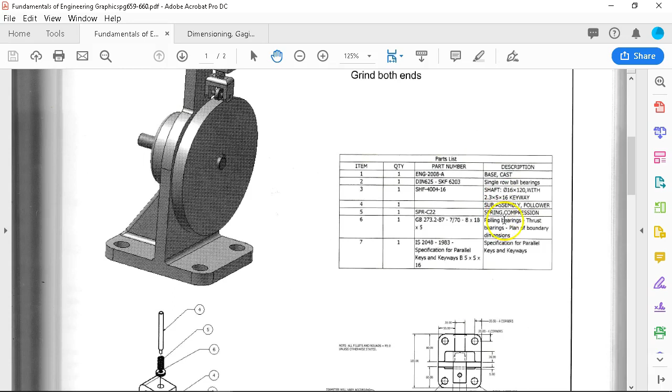We don't know exactly what the materials are. At least I didn't see. The base was cast, single row ball bearings. Shaft, assuming it's going to be a steel or a stainless steel. And then springs, roller bearings, parallel keys, and keyways. So assuming a lot of steel. Right? So we'd like to do an analysis of, if this is a fairly low pressure, maybe I could get away with having aluminum and making this a replacement piece. This is a consumable item.

Since it's going to wear out anyway, we do a 6061, and part of your maintenance schedule is it's easy to make, it's easy to replace, and once a year it gets a new one. All right, maybe it wears out too soon. Whatever this is being raised into and tapping against, maybe it puts too much load on this and it has to be a steel. Well, then what style or grade of steel? Probably not in the 1018, 1020. And if we're making things out of stainless, probably the roller bearing is stainless. We would have similar metals that would have similar wear rates.

And we have to decide, is the bearing our consumable, the maintenance item? In that case, if this is a big honking chunk of stainless, we don't want to replace this every year when we could replace the bearing. So decisions on materials come down to maybe this is a 440 series of stainless, harder, more wear resistant. And then the roller bearings are in the 300 series so that they wear out a little bit quicker.

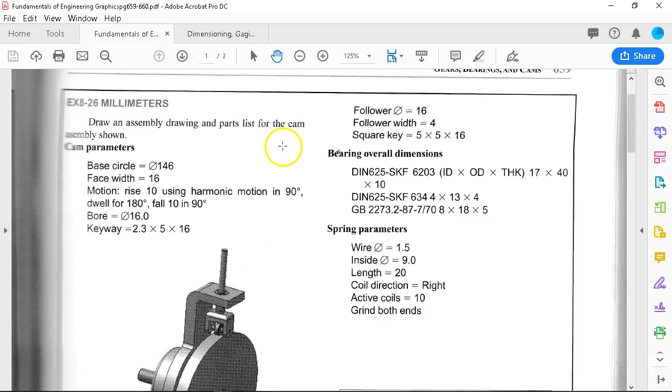So one of the things that I was looking for when we were doing the pulley and had to go back and find it was the chart in the Machinery's Handbook. I found my PDF version, and so those numbers that I was pulling for the pulley, I'm going to have to do pretty much the same thing. So a force fit or an interference class of fit pretty much aligns to a light press, a heavier press, and then you get into you're going to have to heat this one up and cool this one down to get them to force together, and they're pretty much never going to come apart.

So when I go into the cam and I'm looking at that 16 millimeter shaft, about 630 to 670, call it, we're going to be in this range for an interference of between 0.2 of a thousandth and 0.9 of a thousandth. So reading this value, the one that freaks me out every time I look at the notation is these are in thousandths of an inch. So 0.2 thousandths of an inch would be 0.0002 and 0.0009. Have to count zeros there. All right, so not a whole lot of interference, but enough to stabilize and keep this shaft running.

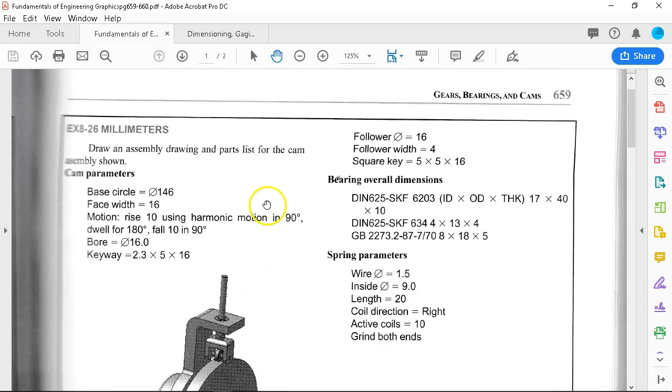All right, so the geometry, base circle of 146, there are no dimensions on this. They're just giving us specifications. Face width of 16 millimeters. The rise 10 millimeters, harmonic motion, 90-degree dwell, and then, or in 90-degree, dwell for 180, fall 10 millimeters. Basically, it says that the center of this circle, the shaft is going to sit 10 millimeters off of center. That also brings up rotational mass.

Right, so something that can affect our tolerance, or eventually will, as this thing wears and goes through its product life cycle, comes back to how fast are we turning this? If it's 10 RPM for the next 10 years, we're probably not going to see a significant amount of wear as long as the lubrication schedules and basic maintenance are performed. But if this is spinning at 1,000 RPM, all of a sudden we've got an unknown mass.

Probably when we get down to it, if we make this 16 millimeters thick, 146 millimeters in diameter, we're talking about 5/8 by a little over 6 inches. We're talking about something that's in the neighborhood of 3 to 5 pounds. All right, so we're talking 2.5 kilograms, maybe 3.

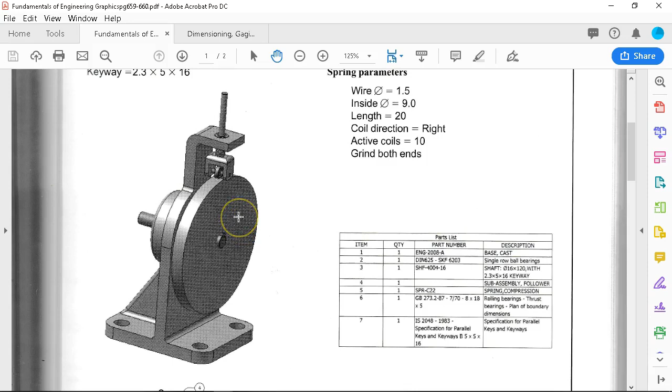All right, so that's some of the things that we're going to enter into this design with, thinking about our tolerance, but also on the other side of it, what are the operational parameters that we want to work with. So I do like to think of this as those levels that you're going to have to contend with all the way from concept to production to assembly, inspection, all the way out to the final end user having to maintain this piece.

All right, so this is going to be interesting. I'm used to having my dual monitors, so base circle of 146. I may pause here for a second and see if I can get this on my other screen.

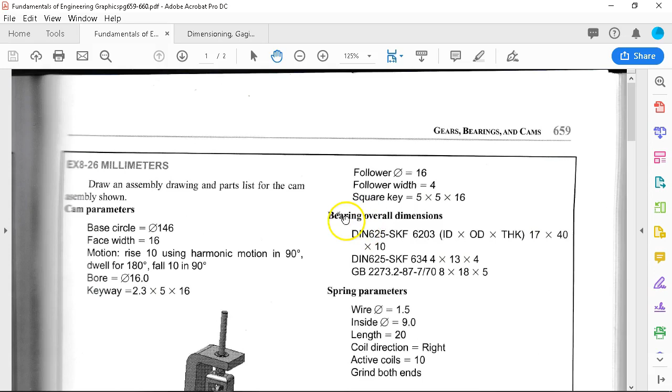Okay, so a couple of things of note before I get away from that one. Just reading through the cam parameters, bearing overall dimensions, spring parameters. We're going to go out to McMaster as a source for these items. Got a couple of good charts and tables, and Misumi is another available. So if you want to replace or look for other items, there are multiple places to pull from. Some are going to have better ordering, identification, those types of things.

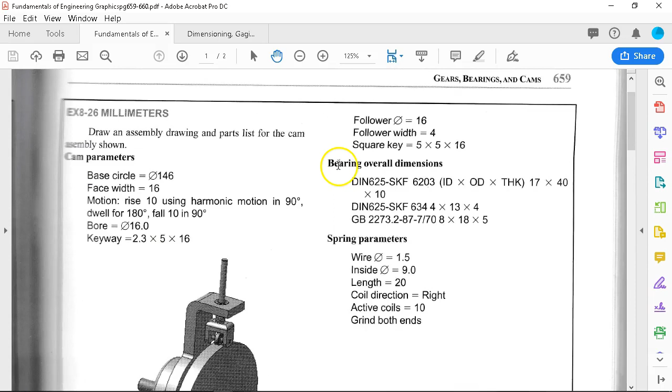All right, so where did that go? Zooming down to the follower and the follower width with the square key. I'm assuming that that is this piece. And then the bearing dimensions, 17 millimeters by 40 millimeters by 10, and then a 4 by 13 by 4, assuming that would be the small one. And then if we're looking at a bushing, we have a couple of options to put a bushing into the top center of the piece. So we're going to go with currently available items, not knowing when this was originally created.

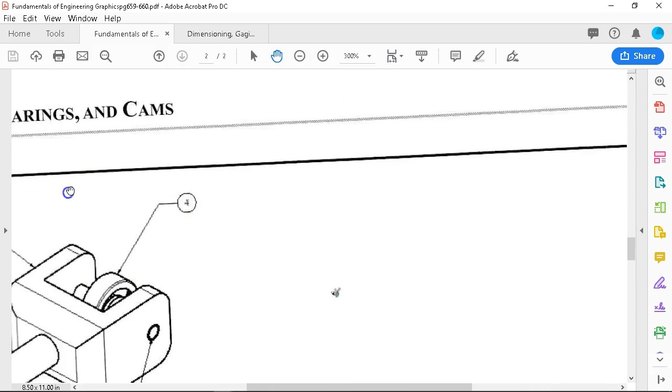So that was what I was looking for. One of the issues is, I don't think we can zoom up on it that great, but you can see that says 16 millimeters on the shaft, but we just said the bearing was 17 millimeters. So either there needs to be a step, or this isn't a complete shaft drawing. The other thing would be, we're showing the shaft, the keyway going through the bearing. Well, if that's going to be a press fit so that we can maintain that rotation, how is this being retained so that it can't move if it starts to wear or lose that press fit, and it's spinning at 10 RPM.

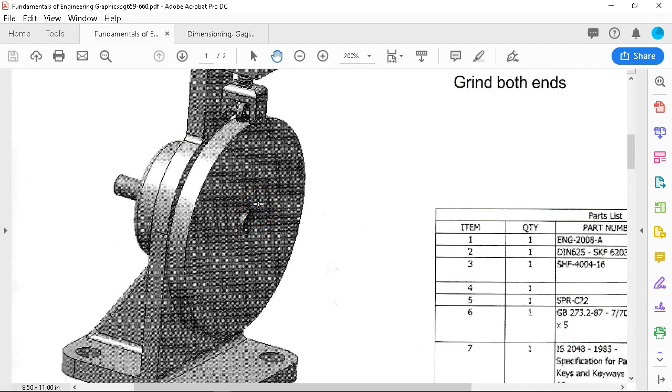I'm not worried about it falling off. At 1,000 RPM, it becomes the saw blade slicing through everything. Then it's a little bit of an issue. So I do want to build in some safety where there is either a clip or retaining or some type of step. So that gives me the opportunity with a 17 millimeter bearing to step this down to 16 millimeters going through the cam, and then putting either a standard washer, kind of like what we did on the axle for the pulley, a button head or something that will provide some retention and compression for the cam.

So that being said, I jumped over into McMaster, and one of the ones that we're looking for is a spring, and I'm interested in what it's going to be doing with our loads and the rates, pounds per inch. We can convert those over pretty easily. So we have a spring parameter wire of 1/16 of an inch, and we need to come up with a wire diameter. And what was the length? Inside diameter at 9 millimeters would be about .375, and .055 on the wire. We're pretty close there, but the overall length of 20 millimeters is going to put us up at like .787. So 3/4 of an inch, .781 would be a little bit closer.

So I don't really see anything in the 1/16 range there, and I don't see anything in the openings. So let's go back to the 3/4 inch. And I think if I pick the bushing that I want, I'm going to end up losing some of that travel anyway. So let's go with the ID and .062. So 62.4 pounds per inch. That's a little stiff, right? I'm not sure exactly what we're trying to keep in contact or what we're pushing against, raising up and down, but that seems a little bit on the high side. But that's as close to the specification as I think I'm going to get until we get something a little more definitive.

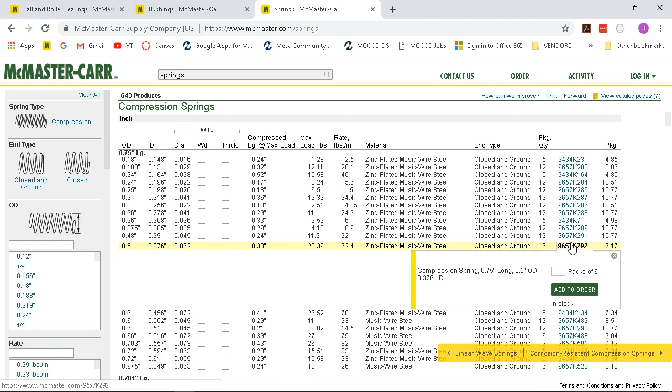Let's see what we can find with that geometry. So we'll get a product detail on it. I want to do the same thing that I did previously, and so max load of 23.4 pounds, and we're not quite an inch, so may not max there. So we'll print that one out, and it looks like I'm going to need to start my document folder anyway.

So we'll make a cam follower project, and under the cam follower, then I'll set up my documents, if I can spell documents. There we go. All right. So even if it turns out that I'm not... okay. All right, I'm not sure what's going on.

All right, well, we have a compression spring then. It's probably going to be easier to do the screen clipping then. That's going to be the case. All right, so that's kind of a first try. Since there's a model for it, then we'll go ahead and save the SolidWorks model. That should be going to my downloads. And while it's doing that, we'll jump over into the bushings.

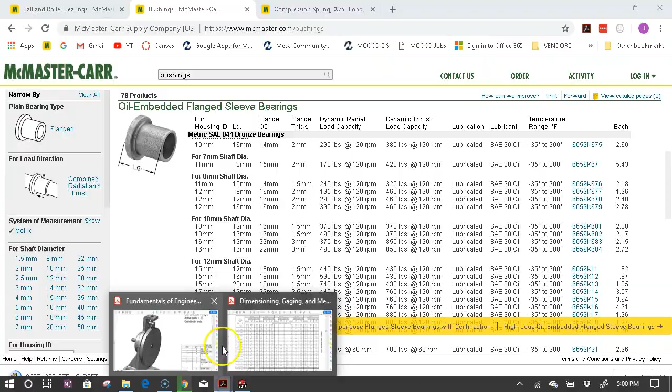So on the shaft, part of the subassembly. All right, so item 2 here. Again, that would be kind of a stainless or something that has a little harder wear resistance for the bushing. It's given with an M5 at the end and a diameter of 8 millimeters. All right, so we need something that I did select for a metric so that we would be staying in that group, and an 8 millimeter shaft. The housing of 11 millimeters, 10 millimeters long. I believe that one's going to work fairly well.

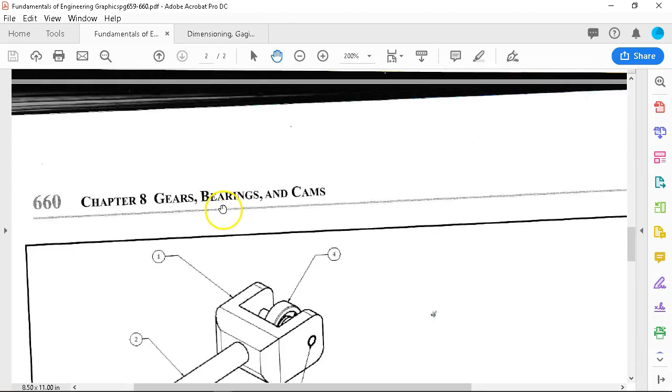If we go back up to the flange that it's seated in, and say there's 10 millimeters there, and if the flange height sticks down a little bit, that takes up some of that room that we lost from the length of the spring. All right, so if I grab that one, and we look at its detail. I'm going to try and print one more time so that we can have these.

And you're going to bark at me again? No? All right, we'll try and save the bearing again.

All right, so while it's doing that one, then we'll look at the bearings. So since this is going to be kind of a permanent installation that really until the bearing fails, I don't want to have to change it out. So our specification was for a 17 by 40. All right, so a 6203 and 12 millimeter width. Theirs is shown as 10, so we may have to make the adjustment since I don't have a lot of selection. Oh, that was the open.

So the thing with the bearings, the open, is that it's going to be exposed. It's going to be able to transmit heat better, but we're going to have to provide a little bit more in the way of lubrication. So we come down to the sealed, and the 17 by 40, 12 millimeter thick. Dynamic load of 1,800 pounds on the radial. I think we're pretty good there. Static of 980 and max RPM of 10,000.

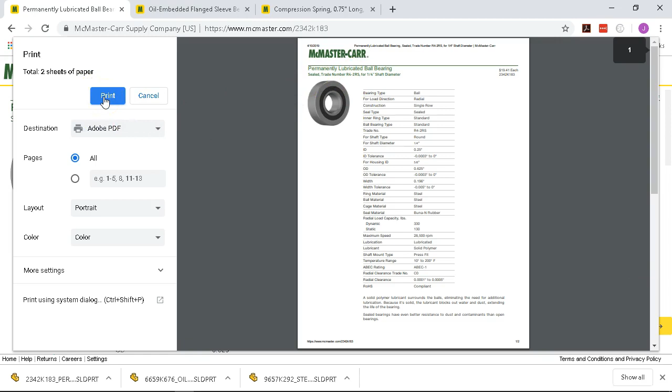Okay. Oh, file is being distilled. Are you sure you want to quit? No. Oh, another one with yes. All right. Well, that's fun. So it was still doing the oil embedded. So not sure what the issue is. I guess probably because they have the links back to the website embedded in. I still don't like that one. Okay, well, I'll come back to that one later.

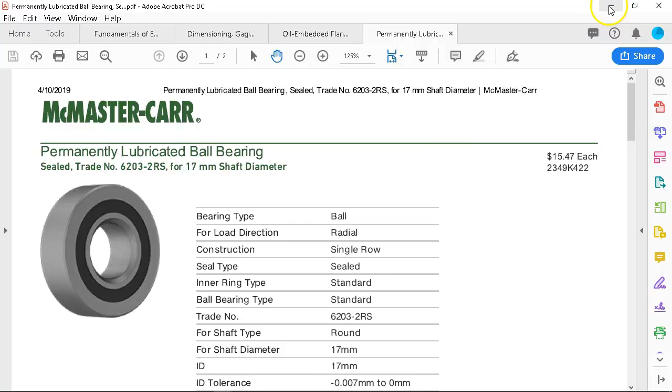All right, so either I hit that one. Oh, there it goes. So it got the flange, it got the shaft. All right, I'll give it one more shot and then we'll call it good. Hey, how about that? All right, so we'll let it finish on those. All right, so I'll have to double check what's going on with those.

All right, so for our cam follower project, if we're going to have top level assemblies and assemblies, then we'll probably need at least a little bit more in the range, and it's not always clear what is going to be the breakdown of assemblies and sub-assemblies. And nope, need to go to that one. So another new folder for the cam follower, just to have some place to start the process.

All right, so I'm doing this in 2017 because I didn't think about having overwritten my 2018 with 2019, and 2019 will cause you some small amount of headache to load the files, where 2017 will just come in and upgrade. So we'll stay with that one, and we're going to be in a part metric, and hopefully it will catch up.

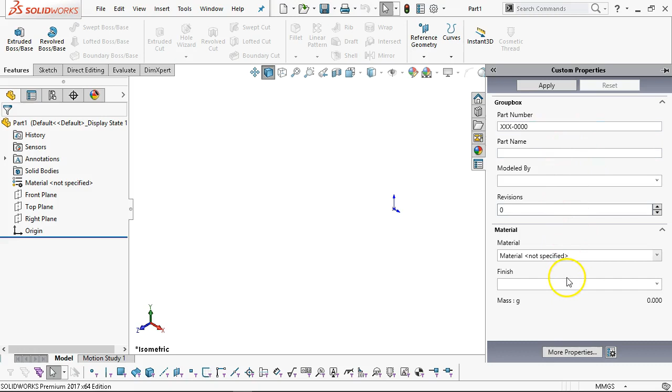Oh, since the 2019 overwrote the property tab builder, it's telling me that anything I put over here as part of my template process, I don't know that we're going to track those out that far, but we'll hold that one in reserve. All right, on the front plane then, my sketch, I'm going to put in the 146.

All right. One of the things that we haven't done with these is if I edit the document units and go back to, I believe it's dimensions, if you would like to see the dual dimensions, to me they're just numbers. Working in metric, working in inches, can convert fairly easy. So if you would like to have both turned on, then it will show the metric on top and the inch in parentheses underneath. That'll give you something to reference to if that's helpful.

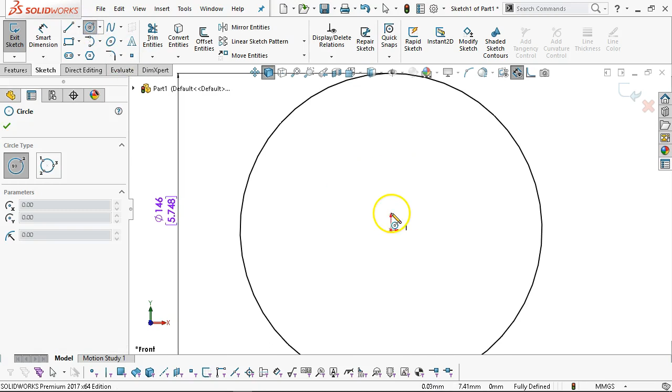For the shaft size, I'm going to stay with the 16 millimeter going through, and then checking to make sure that I've got this oriented vertical. Then I'll set the 10 millimeters on the lobe. All right, so if that's 10 millimeters off as this travels around, then it should raise or lower accordingly. Next question would be, which way do I want the square key? We're doing 5 millimeters by 5 millimeters, which is pretty close to 3/16 by 3/16.

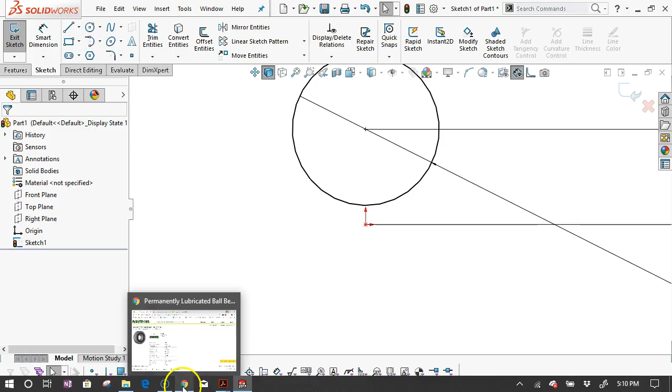That might be worthwhile jumping back into find key stock and just check the availability. So jumping over to metric, 5 millimeter by 5 millimeter, oversized on the tolerance. All right, so that should work out okay. And if I remember correctly, we want the rectangle.

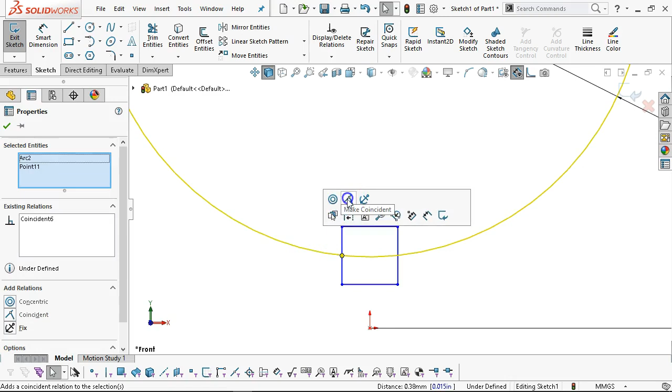So when I do key stock, I pretty much am going to pick the midpoint. We'll set it vertical to the origin, or could set it vertical to the center. And then I also need the midpoint to be coincident to the circle. All right, and then we'll set our dimension, 5 millimeters. That seems awfully big for a 16 millimeter shaft, but if that's what they want to drive it with, okay.

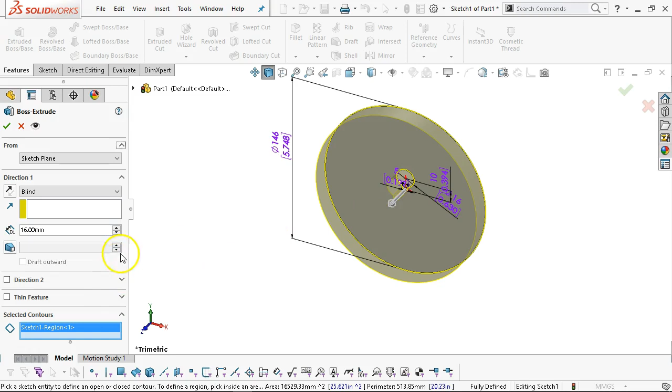All right, so when I go to extrude this out, we're going to give it the 16 millimeters. Because I have overlapping entities that I did not go back and trim, and I don't really care about trimming them, because once I pick in the region, it is going to pick up that geometry, and we can go ahead and set.

All right, so one of the first questions that I had as far as this geometry pretty much came back to, what does it weigh? So if I edit the material, I said we were going to try for a, it would be, if the wear would support the aluminum, that would be great.

Don't want to go into the chromolys, and I don't see a 440, so let's just get a rough estimate with a 304. All right, so I think 304 would still have that decent range of wear resistance, maybe not as much as the 440, but it'll give us a good starting point. And then close. All right, and then under evaluate, we'll go into its mass properties, and we're not too far off. 2,000 grams, we're right there at 2 kilograms. All right, so still a pretty good rotating mass.

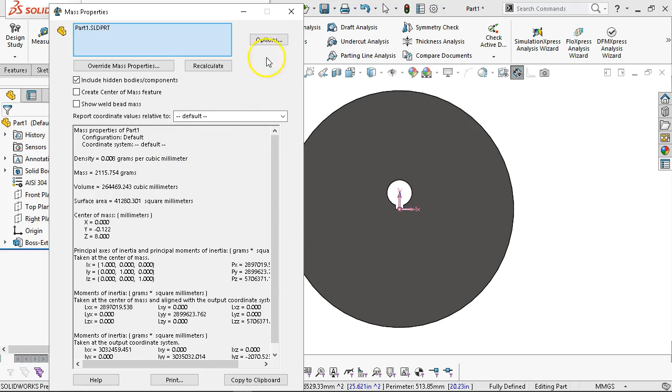The other thing is that our center of mass, shown as the boss there, that's actually not too far off. We have a y dimension. Let's see, pull that out. And the y is the up and down of minus 0.122. All right, so 0.1 millimeters, which now I have to do the conversion, should be about 4 thousandths. That's really hard to justify trying to balance out. Z I'm not worried about because we extruded in one direction. If I had gone mid-plane, that would have been 0.

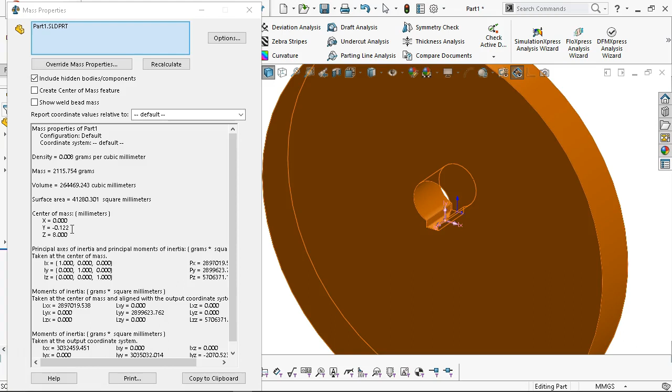So I think I'm going to overlook that one. And looking at the start and stop on the motor for the rotating mass, that may still be a bit of a concern. All right, so that becomes the cam. Oh, and that went to downloads. See if I'll find my drive. Okay. Right, then the shaft.

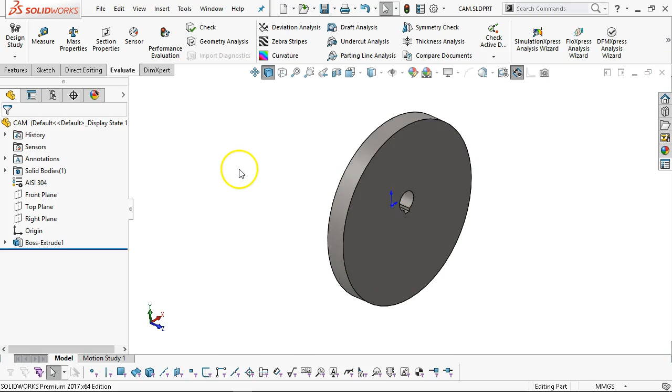So in the stack up on the mechanical design side, really I need to have the frame available to build up this geometry. So I think I'm going to do that one next. The shaft, and we talked about the steps and retaining. We'll save that for later, so I can just close that one out. And so the base, what do they call that one? Just the base. I'm going to do it as a multi-body part.

So one of the advantages of multi-body is I can draw this in its current state. And when we look at the stack-ups of tolerances, we're tying these items together. And anything that is a mounting or a through hole shares the same geometry. So let's go into, my natural tendency would be to make this a 3D sketch. I don't know that it needs to be that complicated. So we'll start with, we can put that on center.

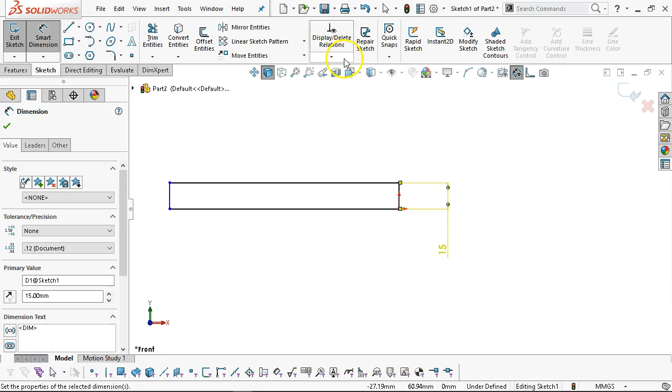All right, and then let's take a quick look. So we're accumulating these up. We have 15 millimeters on the base, and then 15 millimeters on the width. So we'll stay with those. And the length then. Bring that back. Looks like 155.

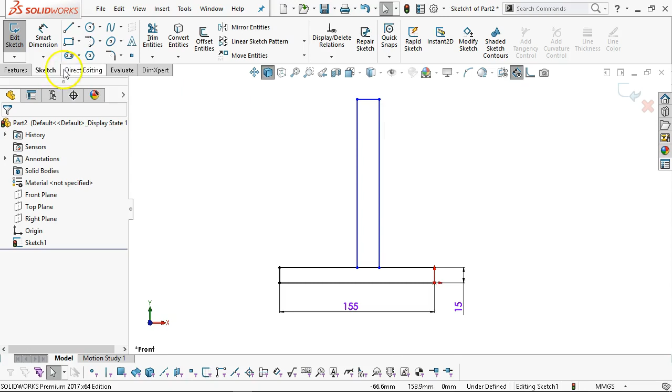All right, so if I wanted this to show dual dimensions, then I'm going to have to do this on every part. So I'm not really that concerned about it. One of the things I shy away from is overlapping the lines, but we'll see what it does. If I needed to, I could window pick and grab just that line and delete it. So as long as I know it's there, that I'm going to maybe have to contend with it, then we'll go ahead and leave it. The overall was 269, but the length minus the 10 millimeters for the cap, we will go 259. And I can always come back and add that in later.

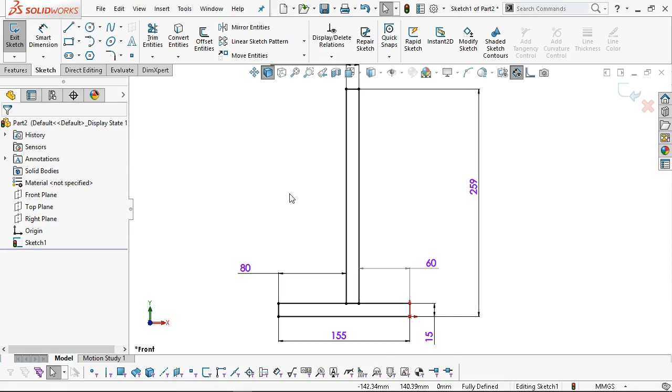15 millimeters for the width. Location looks like about 60. Well, 80 off the back will work. And then if I wanted to see what that was for reference, it should add up 60, but still it's going to be a driven dimension. One of them has to take precedence. So even though it shows both, we're not going to end up with both. So because it's a casting, that may be a result of the decision they made for the casting.

All right, so I'm not putting the radius in, but I am going to tie these together. And so this piece was 15 millimeters or 10 millimeters. Got 15 on the brain now. And it has a width of either 60 or 80. So I'm going to have to zoom up on that one a little bit and see what we get. If it turns out that we can refine it, then I'll pick it up.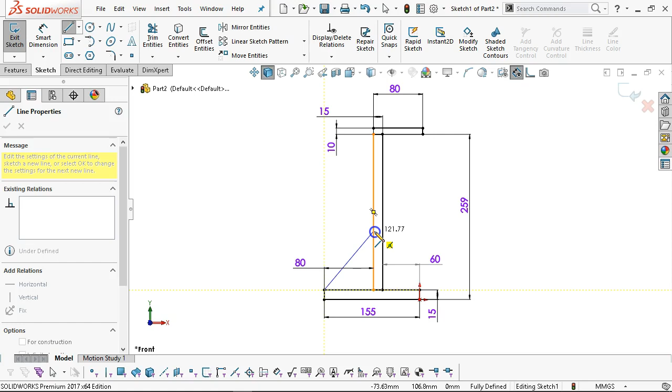All right, so my goal in doing this is to generate a layout sketch that has all of the geometry that I'm going to need, minus the through for the bearing housing that we talked about. And, well, we'll see how that one works out. I'm not entirely sure that this is going to stay an angle or that it's going to support the bearing, but I do need some kind of rib or structure that will help stabilize the vertical component. So whatever we've got there for 80 millimeters, we're just going to make it a 45 degree, if I can pick.

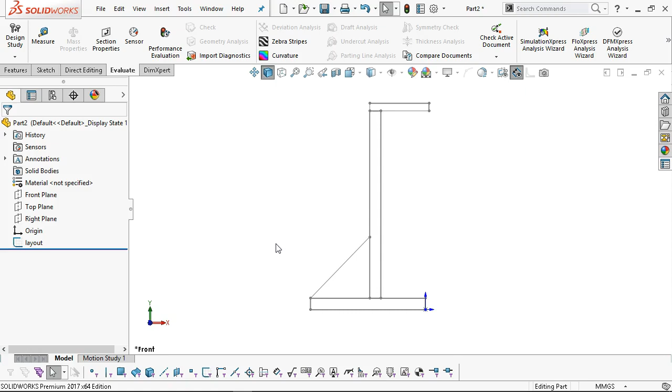And that will give me enough geometry for my layout sketch. All right. So when I create those sketches, I always like to rename. So a single click and kind of a pause and another click will let me rename it. So all of the other geometry, all the other sketches coming off of this will come off of this base geometry. All right. So we had the 155, looks like 130 on the width.

All right. So on the front plane, we open up the sketch, and now I'm just pretty much tracing over the existing. And I want to do this as a mid-plane. So I think I mentioned this with the top down, is that we're investing time up front to create these layout sketches, go through the process. And then the payoff is that the building the model side goes pretty quick. So the mid-plane gives me that geometry.

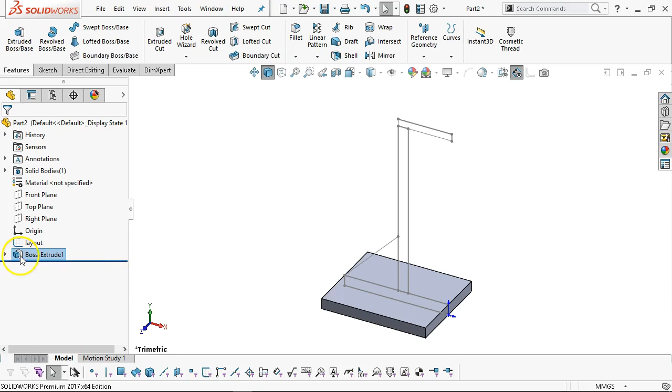And then here's the difference between creating this as a casting, and one of the advantages will be that I could go back and forth on this geometry. But one of the advantages is that I will end up with 4 separate pieces here at a minimum. Okay, so opening up a sketch on the front plane and picking the next item, then extruding the base. And we'll do the mid-plane. Not entirely sure that it will stay at 130 millimeters. I could do up to vertex, up to surface. I'm going to limit how much I tie it together, though.

And then the key here is that I uncheck the merge result. As soon as I uncheck that merge result, I end up with a separate solid body. So on my solid body list, I will have boss extrude 1, boss extrude 2, and I will come back and name those later, so they have a little bit more functionality to the mix.

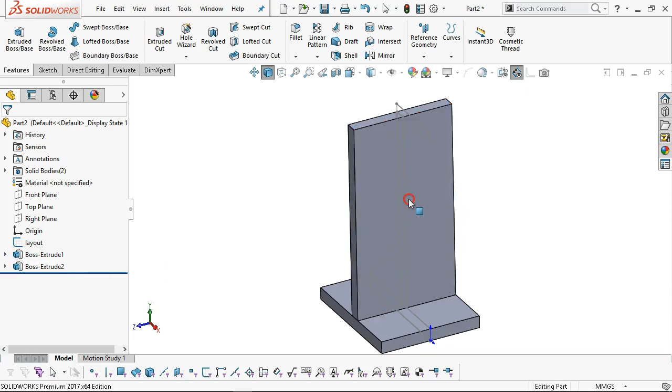All right. So since there is a little bit more geometry here, I do try to group these, and if they get complicated enough, I'll actually create a folder and say, you know, this is the vertical, or whatever we decide to name it, and consolidate those items. So I think at this point, since I didn't include it in the sketch, I'm going to go ahead and create it. So we'll hide the sketch because I don't really want to tie anything to it just yet. And opening up a new sketch.

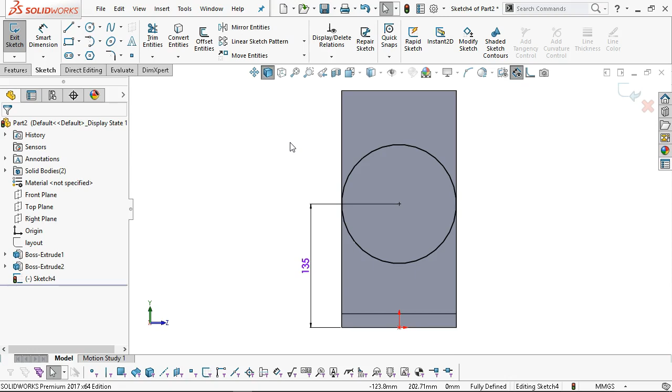Pretty sure that comes down tangent. So a radius of 65, yeah, that would be 130. And then from the base up comes 135. And I don't think that came up tangent just yet. So select and control select. Make sure that I have the edge. We can go tangency. No. And then both sides will need to be tangent for it to tie together. All right. And then the width is 40.

So that one can go to mid. And I'm not sure what that was. I clicked through it too fast. Have to go back and watch the video to see what the error was.

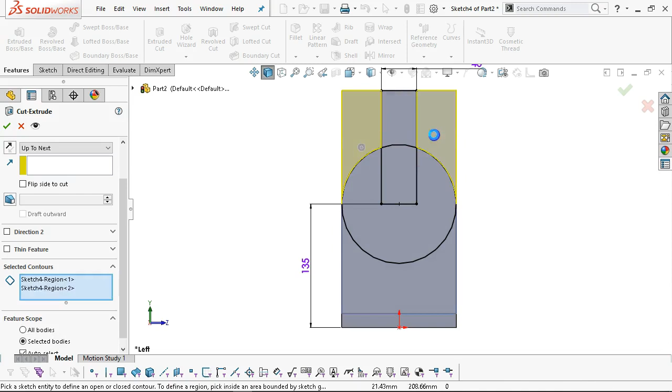All right, so interesting part here is, can I make the cuts on these outside just with the geometry that I have? So if I go into the features and do an extrude cut, it already knows that there is material removed, and I want to tell it up to next. All right, so there's an available region, there's an available region, that will remove it and give it the geometry.

All right, so from a cost standpoint, manufacturing these parts, if I left this rectangular, it would certainly be a lot cheaper. Removing this out is going to add machine time, is going to add processes to it, but I don't know what the relief is. So with the cut extrude, downstream issue may be the interface with this little L shape at the top, but I'm not too concerned about it getting tied into the other geometry.

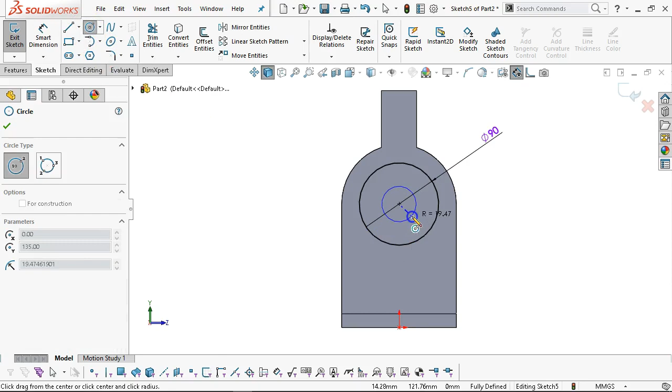All right, so if I start tying this geometry in, though, I'm pretty much going to start a chain of events for our geometry to, you know, kind of what I'm trying to say, have that associativity between the items.

So 40 millimeters on the base, and I think I just want to leave that sketch for reference. If I make that a flange, how about we just leave that one for construction geometry for reference. Let it catch up. And I don't know that I'm going to end up being at 90, but we'll go ahead and cut up to next, or through all.

Okay, so if I have a flange, it can connect. All right, that gives it enough geometry to give me that start. Want to show the layout again, and in my sketch on the front plane, I'll just trace over for the gusset. And since everything else is 15 millimeters, we'll go ahead and leave that 15 millimeters. Mid plane 15. Go ahead and accept.

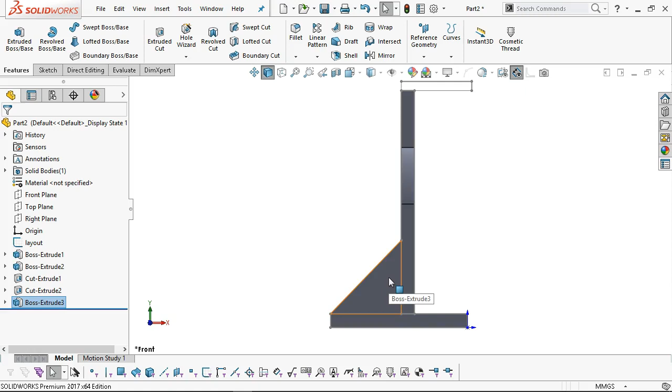All right, so at that point, we're going to see what happens because I didn't uncheck the merge result. And it returns, even though I should have had 3 solid bodies, now it returns to 1. So that count is kind of keeping a relative position for me. And so if I unmerge that result, now it goes back to 3. And I hid something there, so that means that I'll go back and show.

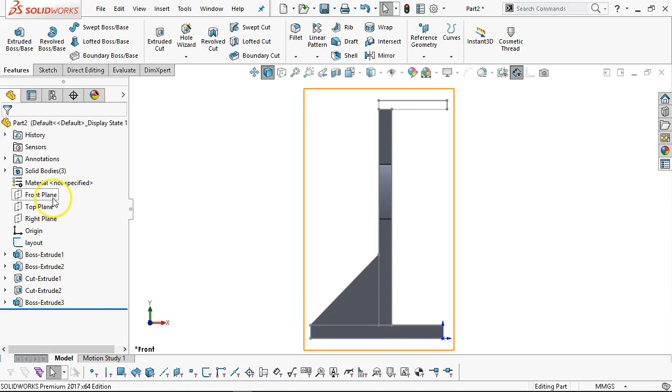All right, so breaking in just a little bit at the 45 degrees. Don't know that that's that much of an issue, but it gives me a chance to address it and make the build. All right, so one more on the front plane, and then we can start putting in some fasteners. Okay, so a trace over the top, and then features, we're going to extrude. I'll stay with the mid plane, and that's going to end up being 40. We'll go ahead and accept.

All right, so by the time I figure out the housing and what I want to do with this, at some point I should save it. That would probably be a good way to go. And this is going to be the base, kind of a sub-assembly. So with the master model or multi-body parts, a lot of times I don't want to get it confused with metric, but kind of the designation master model, multi-body, MB, MM. All right, MB. So this is going to be the parent of those 4, 5, 6 components, whatever we end up with.

And I merged it again, didn't I? All right, so since I didn't see a line here, those aren't separate parts. It's treating it as if it was one. All right, so I'm going to edit that feature and go back and uncheck the merge result. So a lot of times what I'll do if I'm making a lot of multi-body parts is I will hide these items as I go so that it doesn't see that it can merge them. And that gives it some opportunity.

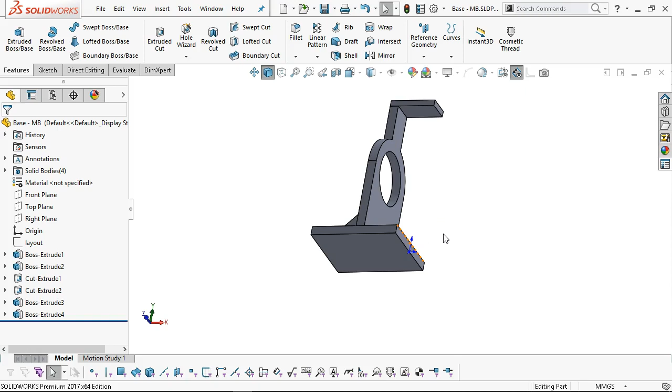All right, so let's start with the base. And we need to be looking at that from the bottom. I'll do hidden lines visible. And so for 15 millimeters, we could go up to maybe, well, we're going to stay in metric, an 8 millimeter, 6 millimeter. Probably don't need 10 millimeters, but then again, it's a 2 kilogram rotating mass, so all of a sudden 10 millimeter bolts don't seem that bad.

So picking the bottom face, I'm going to use the S key to go into the hole wizard, and we'll see what a counter bore. So the choice here is the counter bore is going to allow this to float. If I use the countersunk or the countersink screws, then they're going to kind of self-seat and self-center based on where the manufacturing process put those countersinks, how it tied in through the holes.

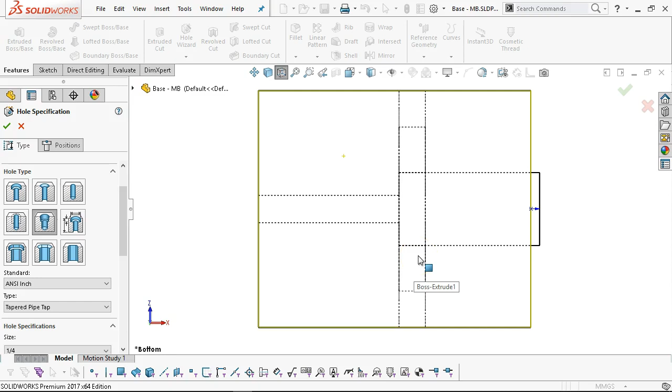My intention is to use, well, I don't know that we'll go with as far as metric dowel pins, but either 1/4 inch or 5/16 dowel pins to locate the vertical to the base. All right, and then we have that stack up of looking at those conditions of what happens when we have the press fit on the base and the floating side on the vertical component to make the assembly. So I think I still want to stay with the counter bore.

As a general rule, the diameter of the thread is also the height of the head of the socket head. So a 10 millimeter socket head will have a 10 millimeter high counter bore that is going to leave 5 millimeters on the base. Right? Again, even if these are mild steel, even if these were aluminum, I think the 5 millimeters is probably structurally sound enough to stay in that mix.

All right, so pick up the counter bore. This is going to be an ANSI metric, and then we'll pick up a socket head cap screw, and size was an M10. And the nice thing about the hole wizard, it's not that big of a deal. It's not a great jump to get it back to an 8 millimeter or something a little bit smaller.

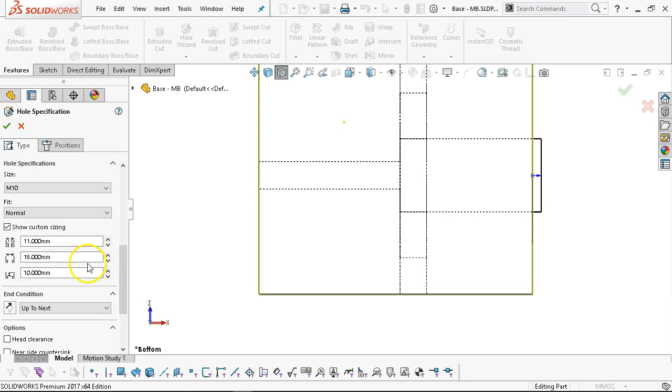All right, so if we show the custom sizing, 11 millimeter as the through hole, that's going to give us quite a bit of positional, 18 millimeters and 10 millimeters on the depth. So it's pretty much what we called for. And if I go 3, trying not to tie those up too much. Question then is, do I stay with the 10 millimeters since I chose that?

2 into the gusset seems kind of extreme, but I don't want the gusset to rotate. And as part of the assembly, when we look at the stack up, the vertical can be pinned, but then how do we assemble? The gusset really doesn't need to be pinned vertically. I don't know that it needs to be pinned, even horizontally. So, for the support and everything that it's providing, the perpendicularity that it's providing, I don't know that we need to make it quite that big.

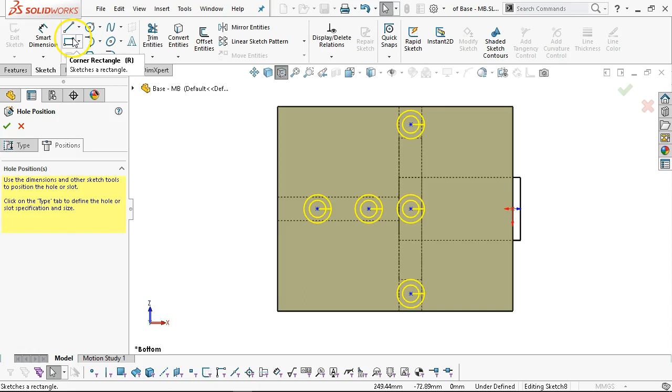All right, so let's find a location. So let's see, was the layout still on? Nope. Let me see if I can show that. All right, I don't know if I'm gonna be able to pick that up, but let's see if it will allow me to center. So it doesn't like that one. Nope, still doesn't like that one. So what I'm trying to do is just pick that one line that I created, and not really going to succeed at that.

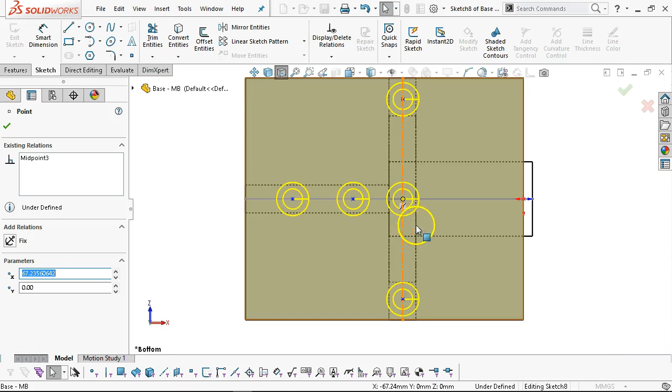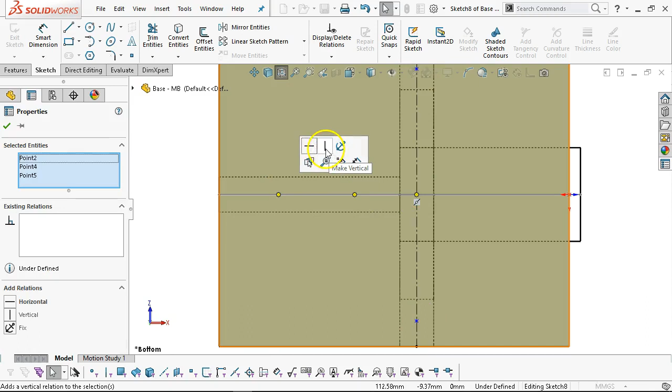So we've got the coincidence. All right, we got 2 of the 3 to line up. All right, so that being the case, until I have a better tool to use, I'm going to come off of that point to that point, and then use that to make a midpoint to a line. And then we'll stay with another center line off of the width. And, oh, actually I don't need that one. We have the midpoint. And I will set those to be horizontal.

And then we just need some locations. So 18 millimeters, probably 25. And then from the outside, and we'll give it 12 and 12. Okay, so go ahead and accept that. I did not give it a feature scope.

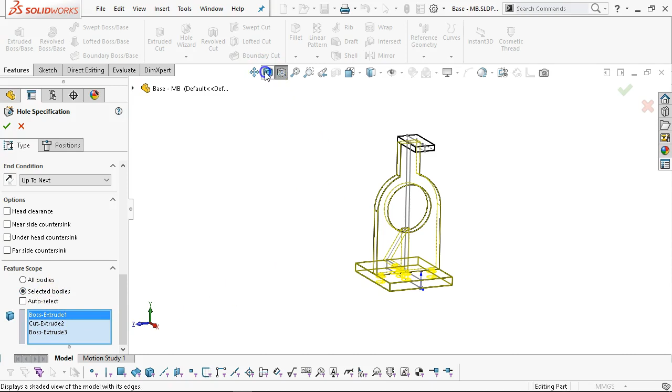So one of the things to check with the multi-body solid bodies is right now the selected bodies are boss extrude and the cut extrude and the boss extrude. I know I don't need all of those. So I'm going to clear the selections and make it just through that base component, boss extrude 1. All right, should it get deep enough or have enough connection to interfere with the others, then I'm not as prone to tie those in.

All right, so figure out where I'm looking at the bottom again. Oh, I needed to do that as a fit. So another S key going into the hole wizard, and I want to make that a through hole. And let's see, I'm not entirely sure that I'm going to go all the way with the metric on that. Drill sizes, if we go with the dowel holes, then I need to pick a size. So if we go with 5/16, 8 millimeters, then we have a clearance, a transitional, or a press fit. So on this side we'll have the press fit,

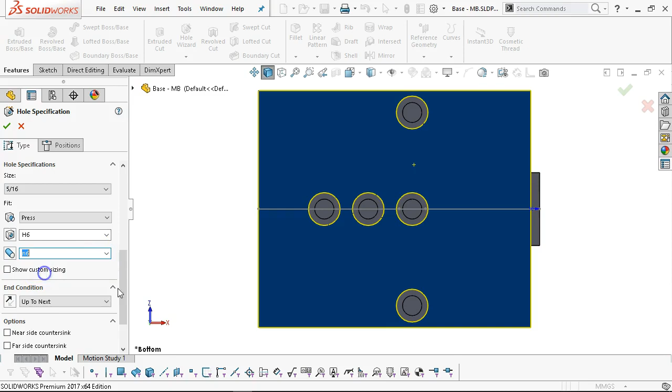and when we pick a class of fit, then this is where we're getting into the G's and H's, and I should have read that definition again. One is the clearance, one is the interference. Let's see which way it's, and then the shaft side. And we'll see if it picks up the up to next. So with the selected bodies, and it's set to auto select, let's just go ahead and put them in and see if it carries through.

All right. So I would probably build this into the main sketch, or like I said, if I had a 3D sketch, I would drive quite a bit of this geometry with it. What do we have? Center line. I'll set to symmetry. And for a distance, let's just see what looks good. Maybe 50 millimeters. Okay. We'll select. All right. So if I go back to the hidden, it did the press fit on this side. At least we think so.

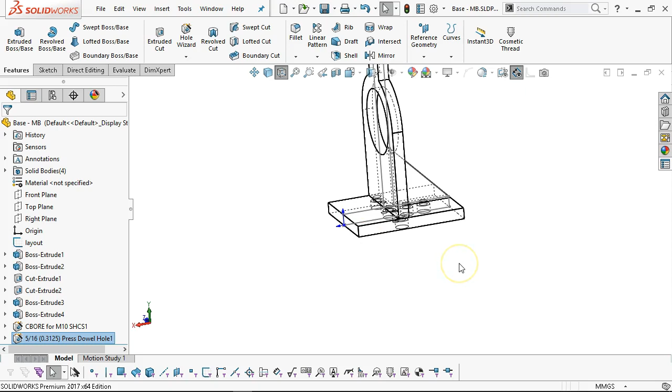And then we're going to pick up the geometry for this. So I'm trying to put all of the geometry into the base that I can before I get the stack up for the rest. All right, so we'll hide that one. And now we're ready for the tapped hole going into the vertical.

And that's going to be an ANSI metric. Probably an M10 by 1.25, so not the coarsest, not the finest. And then up to next, probably not. Let's go 20 millimeters. We have 5 millimeters on the wall, and 20 millimeters, 23.75 deep. We'll be in that range. That means that we could use a 15 millimeter, maybe a little bit longer, and we would have that engagement.

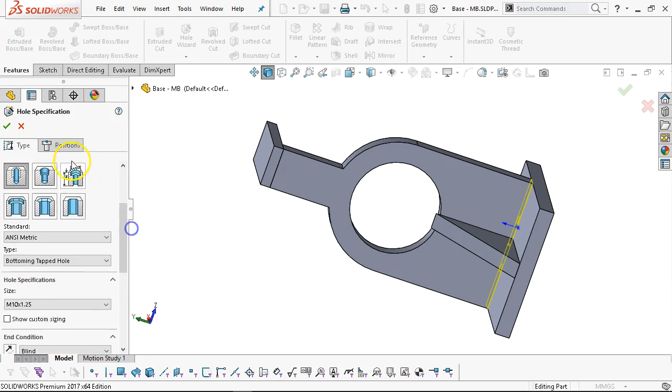That only really gives me at 15 millimeters, though, the 1 times diameter. So 10 millimeters deep on a 10 millimeter thread. Might want to go a little bit more than that. So let's take it up to 30 millimeters and 25 millimeters so that I can at least get a little over the 1 times D. All right, so positions, and jump back in.

And I'm looking for those center points. And when those go fully defined, recognizing the center points, they're now tied together. I think the hole wizard will go between the 2 bodies, so we'll go ahead and include that and see if it picks up our geometry. So 2 on the base, 1 on the front. That should just about cover it.

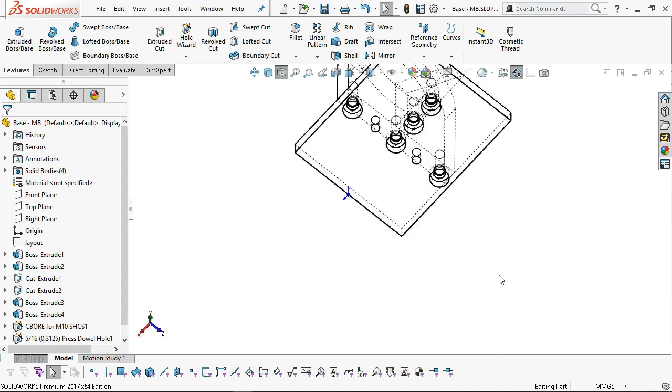All right, so the through holes then. 1 more S key. Design to the through, still a dowel, and then this is now the clearance side. And don't know that needs to be 30. We're going 15 millimeters through, so 15 millimeters with a little bit extra. We could use then a 25 or a 30 millimeter pin to find the intersection. And we'll set, yeah, I think 25 would probably be deep enough. And looking for that edge, finding its center, we'll set the body.

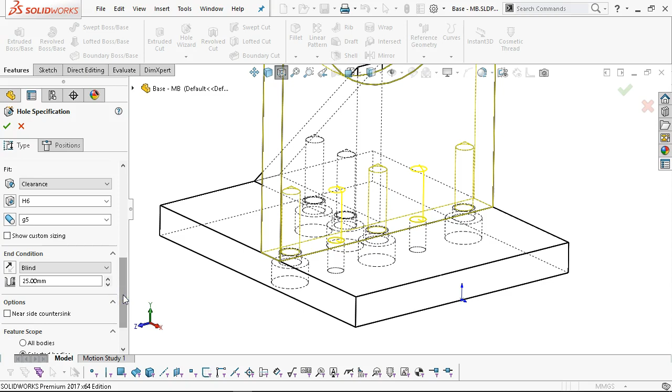All right, so let's take a look at what that looks like in hidden. So, oops, not sure what happened to that one. Oh, 1 millimeter, nice. I did see that. It looked exactly like 10. Oh, we were going to switch back over to ANSI inch anyway. Dowel holes 5/16, and clearance. We'll stay with the 6. I think I'm getting those reversed. I'm going to have to go back and check those before I hand it over to you, I'll make sure that those are correct.

All right. So looking at this at this time is we press the pins in, the vertical slides over, we tighten the 3 screws, that comes into place. We tighten the 2 for the gusset, but we also need one to go through the front of the vertical just to pull it up tight and bring in the geometry. So the other thing to keep in mind on the design point is every time I add one of these holes, add another piece of geometry, it's something else that's going to have an associated tolerance. So I'm trying not to get too carried away on you, but also putting in enough of the design to make it functional.

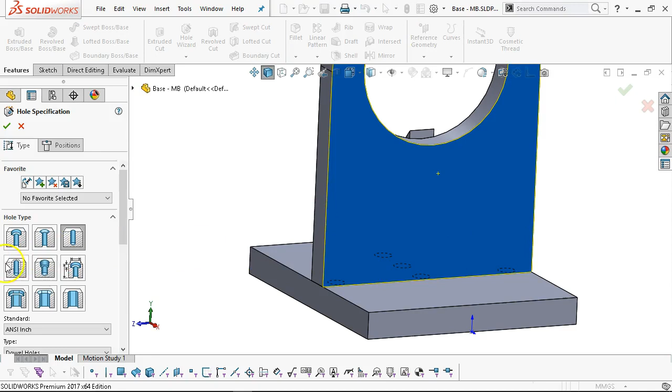All right. So same thing, counterbore, ANSI metric, socket head cap screw. And I think the M10 probably doesn't need to be. So I guess when I have the flange, if I was going to use M6s or M8s, I might do them all the same. So I don't know that those are going to be M10s. I think we probably get away with an M6. We just need to align it and get it into position.

All right, so counterbore, position, place it, and let's go normal to the sketch. All right, so I don't want it that tall. Again, if I have a flange, even if I shrink the flange, I'm going to try not to get that engaged. So we'll go 50 millimeters. I can locate it to the origin, set it vertical.

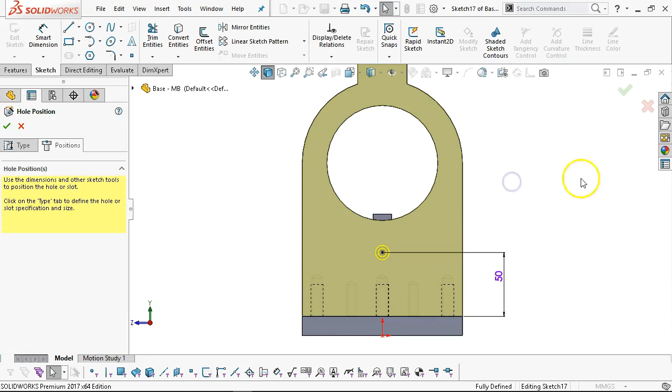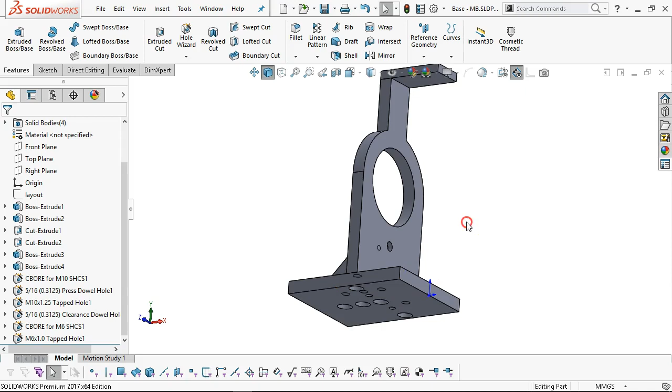So that gives us location, gives us geometry, and then as we're looking through this also is the start of, if I am doing the tolerance, then I have either flatness as being the datum simulator, being able to set that down onto our surface plate, and then checking for parallelism, the perpendicularity to the face so that the flange is parallel to our base, and then finally the leg that is sticking out, that it has enough suitable rigidity geometry to hold itself up.

All right, so last one. We'll do one more. I think those can stay. Since that was 10 millimeters, that'll give us 4 millimeters of wall thickness. So staying with the 6 millimeter depth, or 6 millimeter tapped counterbore and tapped hole. So the question here would be, do I need the precision of putting in a couple of pins? And since I don't really have the room, this might be a better spot to switch over to the countersink.

All right, so a 6 millimeter countersink. And again, if I decide later on that this isn't the best course, then it's not that big of a deal to change it over to a counterbore and add the pins in. All right, so blind will be up to next.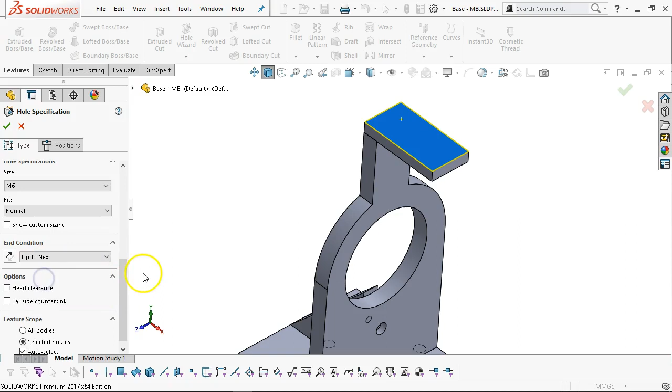And positions, go to the top. And set those vertical. Yeah, I'm thinking the 25 millimeters would be okay. If I go with the center line, then those will stay symmetrical.

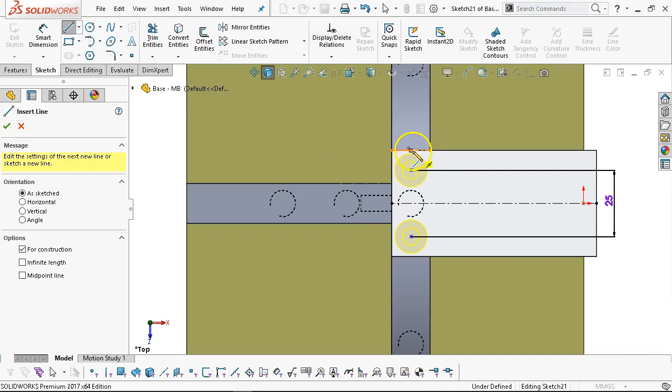All right, and then we're missing off of the base. See if we can pick up that other geometry. So no, I don't want to include that, so it becomes a construction line. Even though the hole wizard really doesn't mind the object lines for whatever reason, I'll still kind of pull it in with the center lines.

All right, so one more S key. We'll stay with the metric. Pick up the M6 by 1. Not an up to next, so it goes to blind. 12 millimeters and 15 millimeters. I tend to stay away from the countersinks. We can put that in as a note if we need it, but the countersinks kind of pick up on the geometry, pick up on the CAM programs as extra noise.

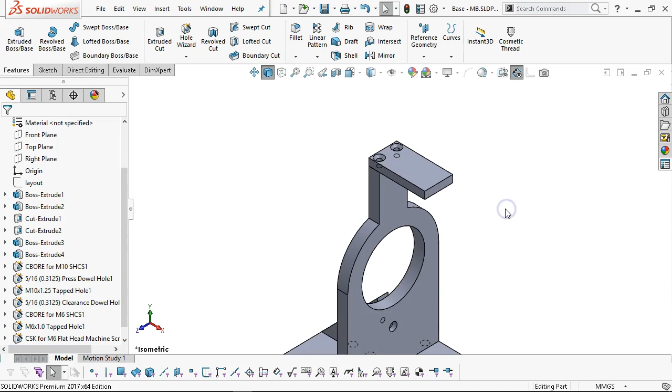All right, so when we tighten this down, the countersinks come down, locate into the tapers, into the cones, and that provides at least a little bit of, it's not going to rotate, it's not going to affect the geometry. All right, so the couple of times that I saw this, it's sticking out a little ways, so let's measure, and we'll evaluate.

So normal distance of 5 millimeters, looks like a DX of 5 millimeters, and thought that was 60. I had it at 80. Probably going to end up being 60. All right, so we go back into the layout. Double click on the layout. Find my dimension. Double click on it. We update it to 60, and then rebuild, and it will update. And now it's sitting interior, which is a little bit more of what I expected.

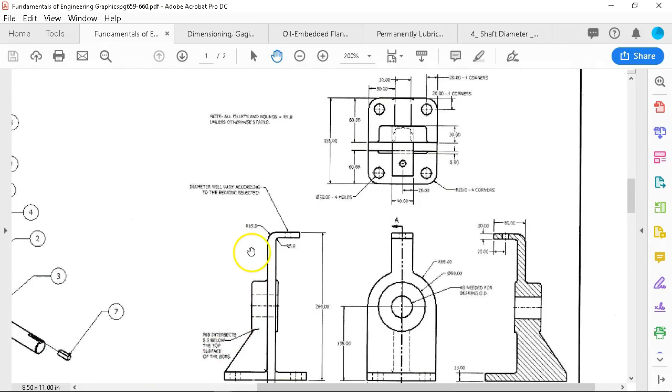All right. So the final bits of geometry kind of followed my pattern pretty well. I missed the base holes, so let's go ahead and do a save real quick. So I missed the base, and then we need the through. So let's go back over here, and so that was given as a linear 22 from the end. All right, so we're going to have to line that up and make sure that it stays on center with the cam.

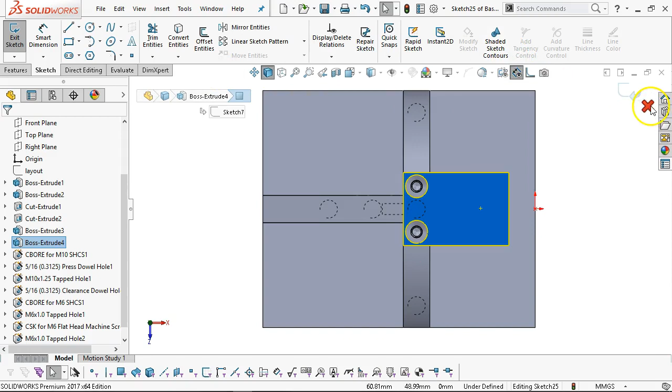All right, so having done that, the flange bushing that I picked, the housing ID, 8 millimeters, 11 millimeters, 11.03 for the OD for the press fit. So it looks like I need an 11 millimeter through. Yeah, I want to stay with the hole wizard on this because we're going to stay with the class of fit.

All right, so ANSI metric, the dowel. All right, so it didn't do a hole size for 11 millimeter. Interesting. So that's always a little bit of a concern. Well, it is picking up a dowel. So that one probably isn't going to be a standard. All right, so we'll have to treat that one separately, or I'll look into it a little bit more and tie it back together.

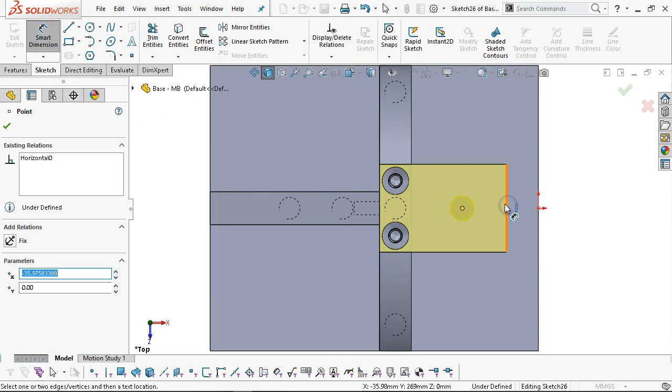And up to next, the position. And horizontal to the origin, 22 millimeters back. Okay, didn't exactly want it to dimension. 22 millimeters, and we go ahead and hit OK.

All right, so last pieces of geometry on this one. Let's see, we had a couple of radiuses. We also have the 20 millimeters for the 4 holes. And need a position. Well, they're going to be at the centers, so always a little hesitant. I want to put the fillets in after. So since they're 20 millimeters all the way around, I'm going to go for midpoints.

Oops, don't need that one. And 20 for the vertical. And then to locate, we pick up the midpoint and the midpoint, and then this is going to be extruded cut through.

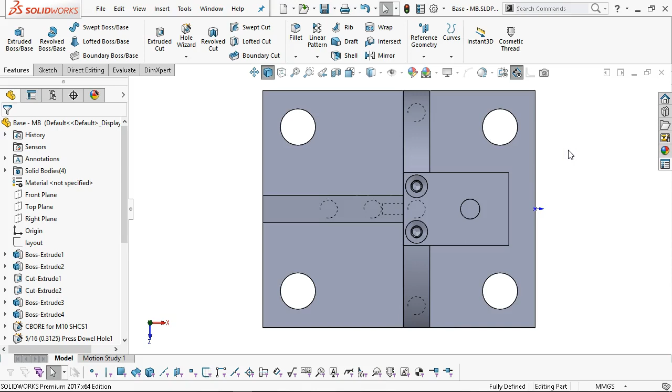All right, so I know there's going to be a few more fillets, but if I do the fillets last and as a group, then I can treat them, let's see, 20 millimeters, I can treat them as kind of the last. If there's any issues, any problems with the design, then I don't have to include the fillets in the overall analysis and the overall review.

All right. So, well, that's running a little longer than I expected. So, the end result is that I end up with a gusset. And so, right before I kick these out to a separate assembly, let me tie it back to the assembly a little bit. That'll help me keep track of it.

So the cap, and then pretty much that one will be the base. All right. So the end result is I have this part with all of these individual pieces, and I can extract them out and make drawings of the individuals, but I really am not going to be able to do the fasteners. I'm not going to be able to do the types of things that I would like to do.

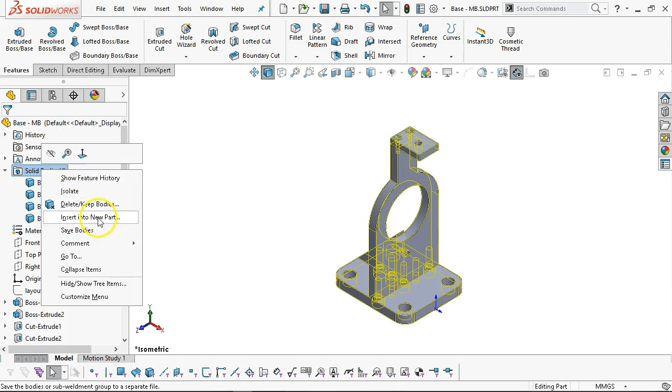So we have on the right click, insert into new part, which doesn't really help me, and we have save bodies. So they're going to go to the metric template. I have it set to ask me which template to use, and then which assembly. So apparently I don't have a metric assembly handy. So that one's probably the closest. Yeah, we'll stay with it. All right.

So it gives me this save bodies, and auto assign names pulls the names that I gave the bodies. And we need to go ahead and create the assembly. So this is the cam follower base. I'm trying not to write a novel into my names. Right, so it's showing each of the items where they're located. What else do I need? Don't really care about the visual properties. The origin location at the default should be fine.

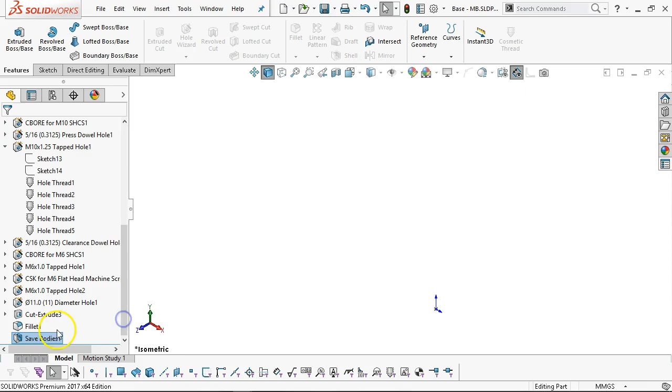So when I go ahead and save this, keep my fingers crossed. It clicks, it whirs. We tell it to rebuild and save the document. And after it's done, I don't think I told it to consume anything. Oh, maybe I did. Probably should check that. All right. And the assembly. Oh, that was the one I missed. So the consume cut bodies, yeah, probably not. All right, so I would like to be able to modify and work with those if I need them. So now my bodies are still there.

And one of the rules is that anything that gets built after this save bodies feature does not propagate downstream to the rest of the models. The other thing is I do not want to suppress this. If you suppress the save bodies, then it takes all of these solid bodies names, and it sets them back to whatever the last feature was that was added. That's kind of a pain to also correct for.

So even just like the top-down assembly, it comes with tricks and traps, it comes with issues. And so if I need to make a change that doesn't include one of these, I can perform a rollback, and the rollback is legitimate, but the no-no is suppressing the save bodies.

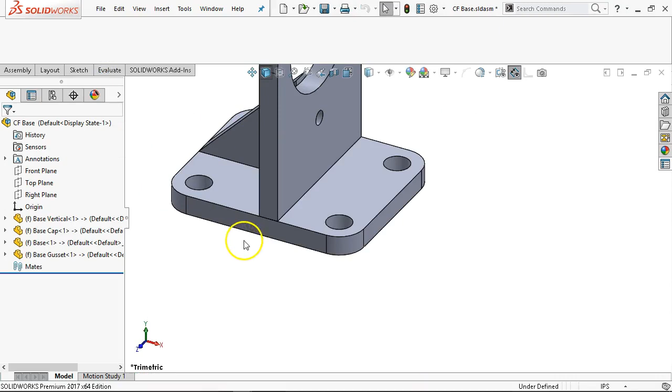All right, so what this did for me after all of that, I'm going to go ahead and save one more time, is when I open up the assembly, now I have something very similar to a top-down assembly model where these are virtual components or assembly components. The advantage here is that they're all tied back to that MB, that multi-body part. Okay, so the base vertical, the cap, and the components. Each of these is now a separate part. If I go back into the folder and into the base, this is the parent, these are the children, and that is the assembly that all of these created.

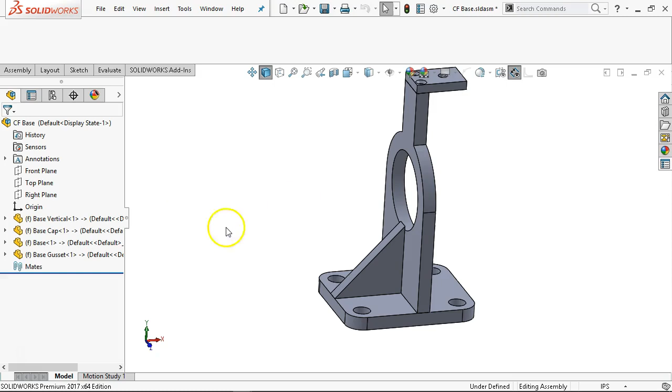All right, so as you go through the process, it gives you a chance to make those alignments to very quickly change and adjust. And so when I make my decisions on the flange and on the gusset and tie those in, that geometry will update and it will propagate downstream to the other items. All right, so what I need you to be aware of is that when you open up those parts, it should open up this multi-body part by default, by process, because it needs to have this geometry available.

So when we take it into the drawing, rather than picking each of the individual solid bodies, we're now going to pick each of those parts. All right. So as a strategy, maybe a little quicker than building each of the parts and assembling them and then making adjustments as we go. We'll do the trade-off with the follower on the top down. All right. So when I get this into a drawing, then you will have the task of putting the tolerances on it.